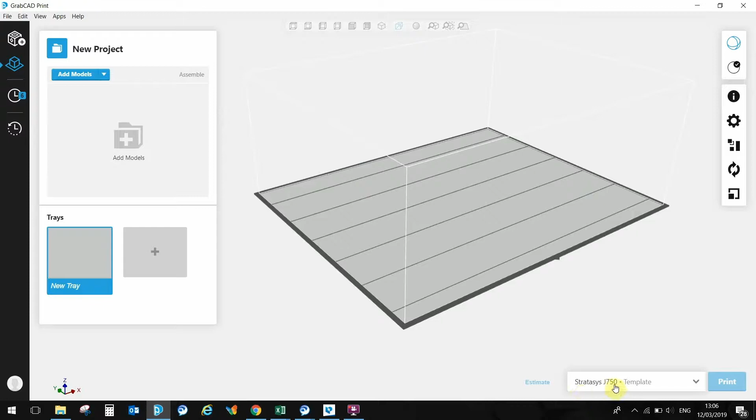So first off, let's make sure that we have the J750 selected here from our template, from our default printers, and then I can go and add a model. So let me go to add models, and for this example I'm going to add my flexible spatula head.

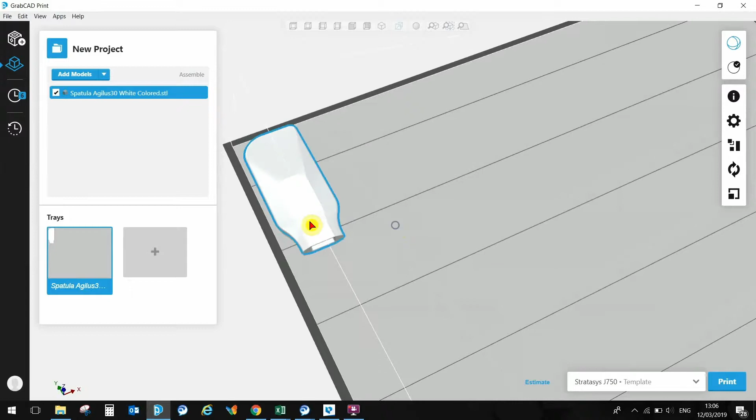And here we are, that's been now imported into GrabCAD print. I can go and orientate that part so it's in the optimum orientation for printing speed.

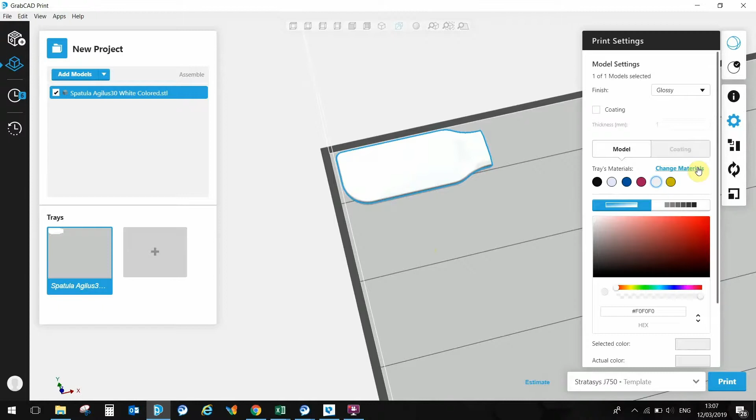And the next thing to do is to go to my print settings, and let's now look at the materials that we are dealing with. So first off, this is the default set of materials that is loaded on the J750 profile. If I was connected to a printer, I'd be able to get the printer's loaded materials from the materials cabinet.

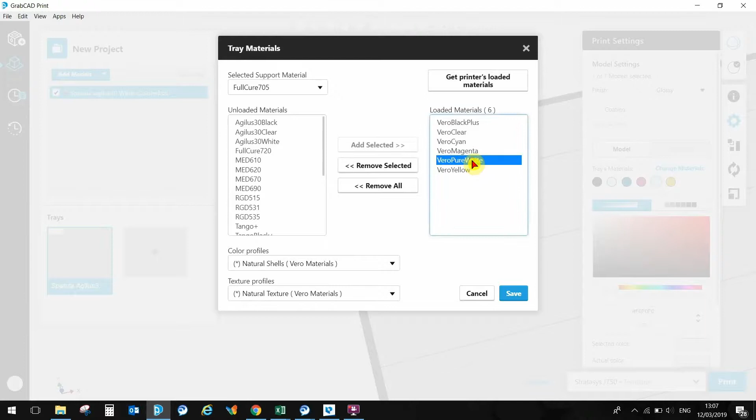In this instance, I wish to remove my Vero pure white material, and I'm going to add the Agilus30 White material from the unloaded materials list. So let's go add selected. Now just note that this has applied the Agilus30 White profile to the part, so that my parts will come out in color and flexible.

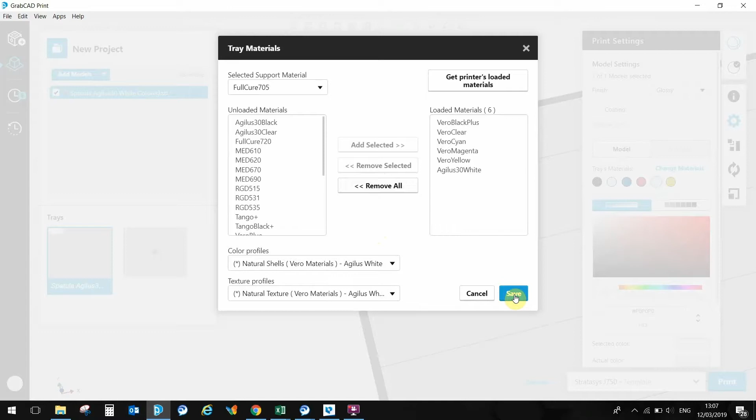So let's now go and select a color. I can either select a color from the color picker, or I can add a color via the RGB input here.

If I scroll down the list, I can see what the actual color will turn out in comparison to the selected color. This is a form of soft proofing, and also grayed out here I have my Shore A level. Now this could be activated as a slider, but in this mode that's not activated. However, it does say here what the Shore value is.

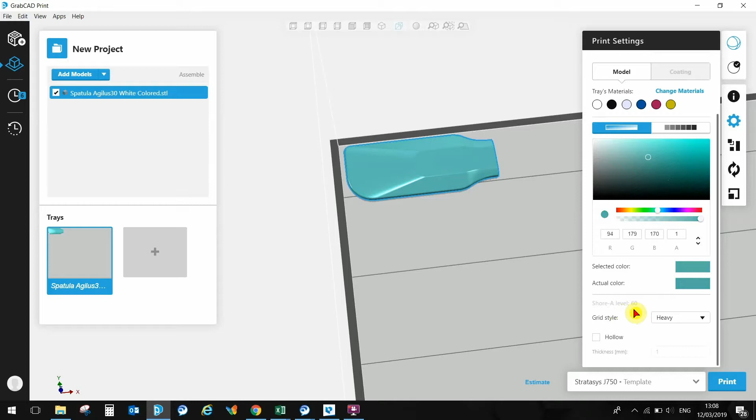So in this example, for this color, that's a Shore level A70. If I change the color by adding more white to it, I'll be able to see that the Shore level has adjusted and is now a Shore A60. So that will be a more flexible material.

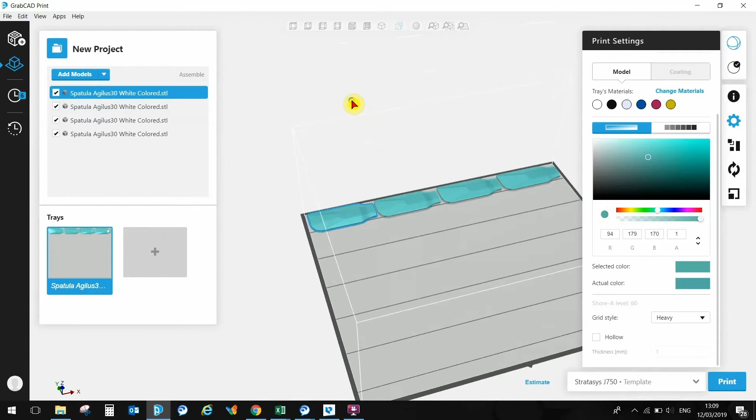So I can go off and duplicate this part, and we can apply different colors. So if I wish to have different colors applied to this model, I can do that, or if I wish to try out different Shore values, I can do that too.

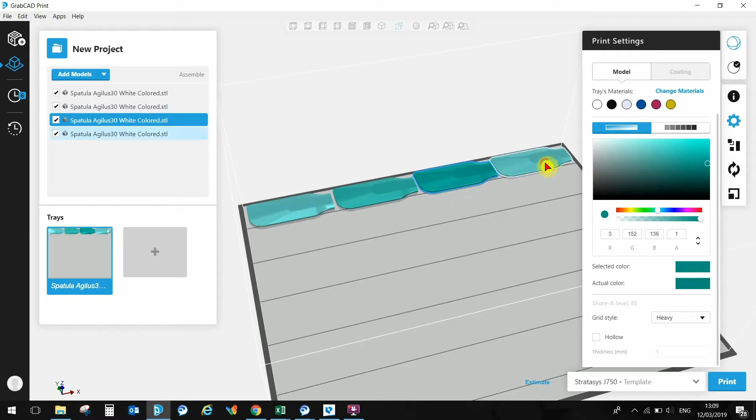So I simply select the model and I can adjust the color. So this is now Shore A70, and this one here is now a 85 value, and here let's change the color completely.

Something like that. So we can very quickly see that the amount of color pigment means that there is less white in the part, and that is giving us a more rigid part that is less flexible. So if I select a black color, then it will be off the Shore A scale completely, and it will be a completely rigid black part.

The next thing to do is to select my parts and to make sure that I have the finish that I want. So at the moment glossy is selected, I'm going to go for a matte coating.

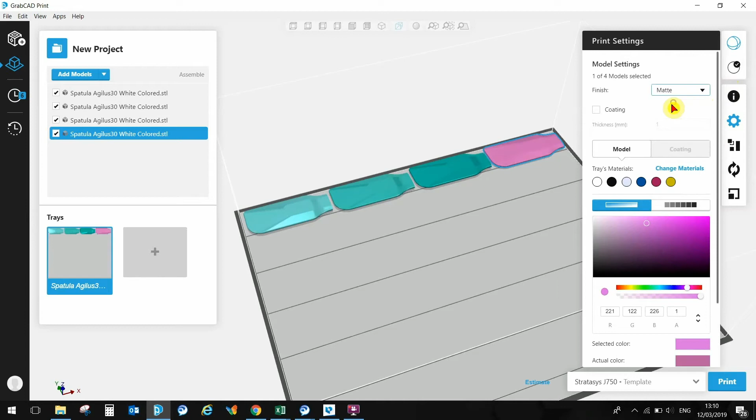And the last thing that's left for me to do is to carry out an estimate for these parts, and that will give me a time and a materials estimate. So this would be printed in high mix mode, with a 1 hour 45 minute print time, and here is my materials and support estimations as well.

So now the job is ready for print. I can simply click print and send this file straight to the printer.